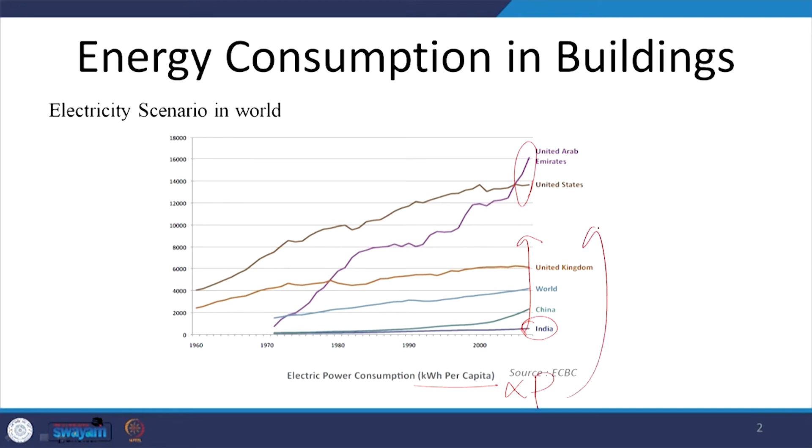If we look at the energy scenario of the world, we can see that the per capita consumption of energy, in kilowatt hour per capita, the developed nations have very high per capita numbers, and our country has very low per capita energy usage. But if we look at the overall numbers, the population and the absolute numbers, we are quite high simply because we have a huge population, and if we multiply this kilowatt hour per capita by our population, we would see that we are quite high up there when overall energy consumption is concerned.

If we look at this energy scenario of the world, since most of the development in nations, whether they are developed nations, developing nations or underdeveloped nations, is directly linked to the energy available in a country, every nation focuses their attention towards creation of new energy sources or towards conservation of energy when simultaneous development has to happen. So, a large percentage share of GDP is actually going towards the creation of energy resources.

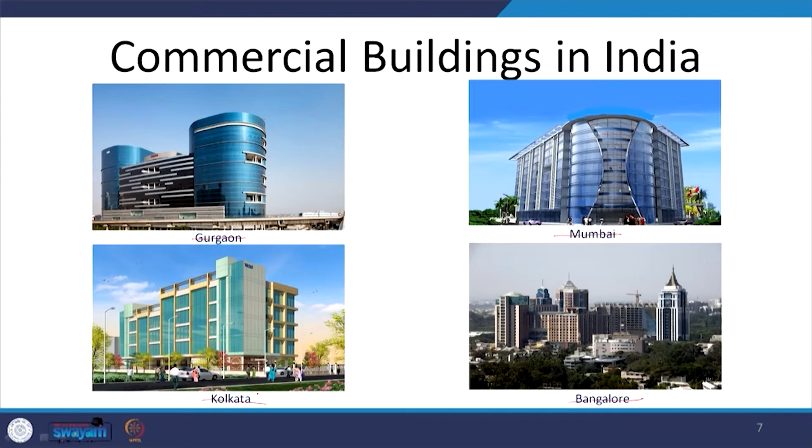And we look at some of these buildings in different parts of our country, they look very similar. So, if I remove these names here, they more or less look the same. This is the kind of commercial buildings which are coming up in India. So, they are extremely energy intensive.

They consume a lot of energy, not by virtue of their design. We are not even talking about the design. Some of these buildings may be highly efficient, they might be using the best of the materials, but just by virtue of the functions that are housed within them, these buildings are highly energy intensive. However, we can still reduce or contain the amount of energy which is being consumed in these commercial buildings.

Now, if we look at the concept of energy efficiency, it is a very simple concept. If around 100 units of primary fuel has been supplied, through the process of electricity generation and transmission and distribution, finally when the energy reaches our household or commercial buildings, only 24 units are supplied, which implies that if we save 1 unit here at the end user end, around 4.2 units will be saved at the power plant end. And here we are not even looking at what goes behind this.

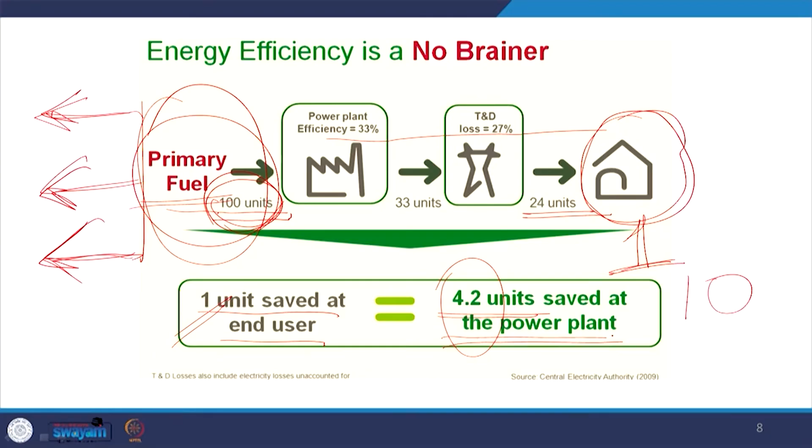So, while we are talking about adding a lot of energy sources, we should ideally simultaneously be talking about energy conservation and energy efficiency at the demand side, where for each unit saved, we are talking about at least 4.2 units saved at the power plant end. Hence, a very simple proposition, and also the investment which is required to manage the demand side is much lesser than to add more supply to the supply side.

It is a low hanging fruit, it can be done right away, right now, and it does not require long term planning. It is a short term planning which is required, and we can start doing it immediately. That is why we talk about buildings and conservation of energy at the building level itself.

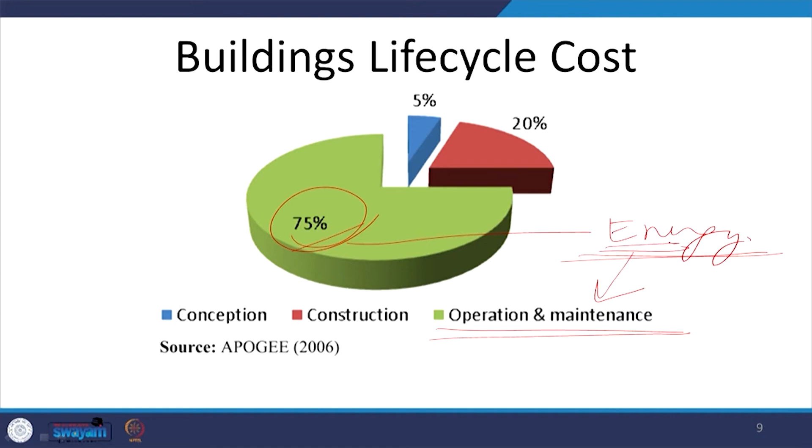If we look at these buildings and we look at the life cycle cost of a building, we can see that around 75% of the life cycle cost of the building is during the operation and maintenance phase. And of this operations and maintenance phase, a large part of the cost is actually the cost of energy. Besides energy, there are other resources which also inflow. For example, water is there, some material is also there, but a large part of the cost which goes towards this operation and maintenance is the energy cost. And hence, we talk about conserving energy, making our buildings more and more energy efficient.

So, I have been using energy efficiency and energy conservation quite interchangeably throughout my discussion so far. I use energy conservation sometimes, I use energy efficiency. Both are the means for demand side reduction of energy use. However, they are not exactly the same things. They are two very similar but distinct terms and processes.

So, when we talk about energy conservation, we are talking about any behavior or a process that results in the use of less energy. So, for example, turning the lights off when leaving the room, or making more and more of your spaces naturally ventilated and not air conditioning them at all is an energy conservation practice.

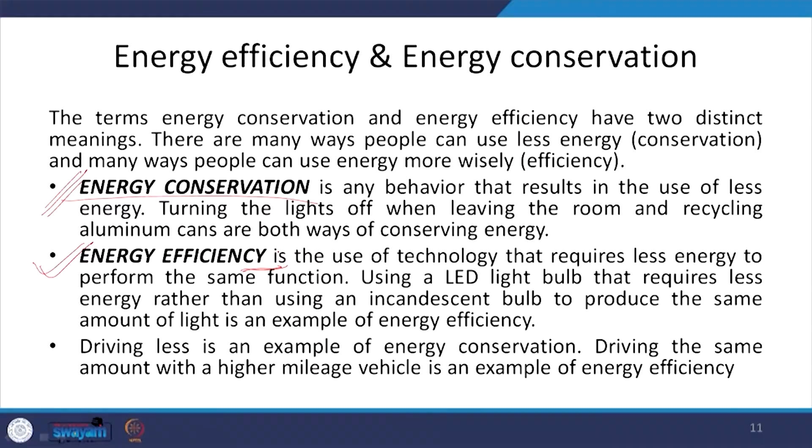While when we talk about energy efficiency, it is the use of technology that requires less energy to perform the same function. For example, in any room, if we have to provide for 100 lux or 300 lux of artificial lighting, after we have already reduced this demand by adding daylight. So, if I have to provide for 300 lux, while I have already taken into account the energy conservation measures, instead of providing a CFL or an incandescent lamp, I would actually be using the LED light bulb, which will be more energy efficient. So, for the same amount of illuminance, I will be using less electricity, and that is what energy efficiency is.

So, both energy conservation as well as energy efficiency are needed to reduce the demand for energy in buildings. So, if we are talking about energy conservation, we are talking about the design principles. We are talking about how do we design our HVAC, how do we design our lighting and electrical units. While when we are talking about energy efficiency, we are talking about building envelope. So, what kind of materials should be used and what should be their thermal properties? What kind of HVAC systems?

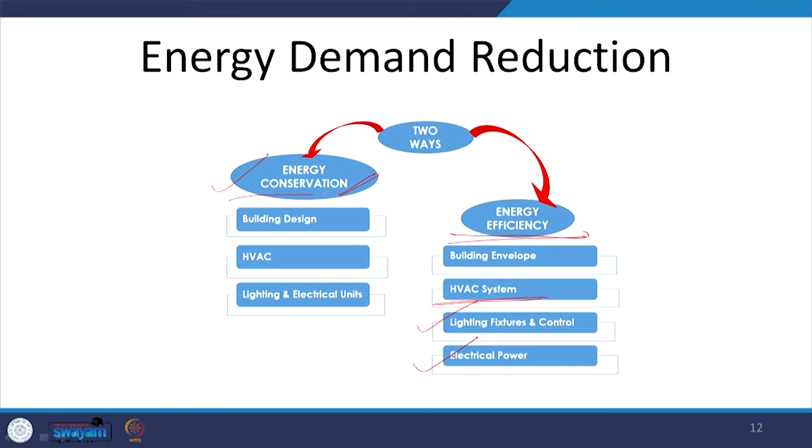So, again we are talking about HVAC system, but besides design, here we are talking about the efficiencies of these HVAC systems. So, maybe we have already reduced the tonnage of AC from 500 tons to 300 tons, that is through conservation, adding different types of practices and design strategies. But that 300 tonnage of HVAC can also be installed with very high coefficient of performance or very high energy efficiency. Same as with selection of lighting fixtures and their control mechanism, the sensor technology and also the electrical power. So, when we are talking about energy demand reduction, we are talking of these two ways simultaneously and not in isolation at all.

Now, when we talk about this demand side reduction, we are talking about the fundamentals of building physics. We should know how the energy is transferred and what are the different functions for which energy is consumed in a building. So, when we look at this energy consumption pattern in a building, there are various functions for which energy is consumed. Largely, energy in a building is consumed for maintaining thermal comfort, for maintaining environmental comfort inside the building, that is for HVAC, heating, ventilation and air conditioning.

So, our mechanical fans, the air conditioners, they consume the maximum amount of energy. Besides that, a huge amount of energy is also consumed by lighting fixtures. So, the artificial lighting fixtures which are installed in the buildings, they also consume a substantial amount of energy. So, these two are the major guzzlers of energy, besides of course the equipment and tools which are anyways going to be there, and also processes like cooking, or in commercial buildings there might be processes like computing, photocopier, stationery,

and several such activities. So, whenever we are talking about building energy efficiency and building energy conservation, we are largely focusing on these two heads, which is energy consumed for thermal comfort, environmental comfort creation, and for the artificial lighting purpose.

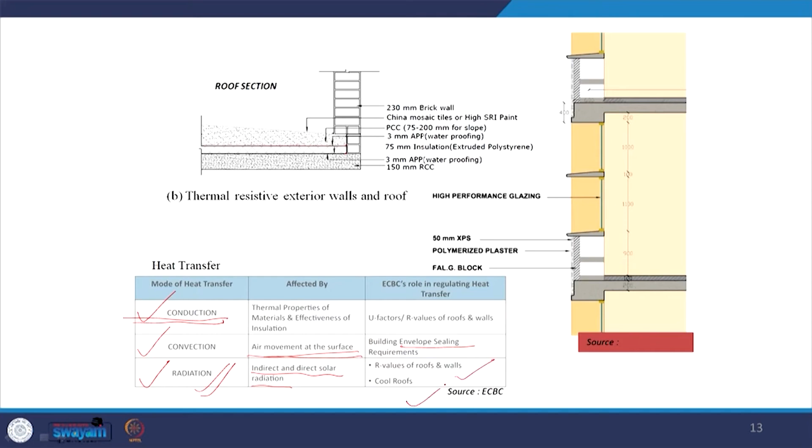Next, we are talking about convection. Now, heat transfer through convection takes place because of the air movement at the surface and also through the fenestration. So, when we are talking about this heat exchange through convection, we will be talking about the envelope sealing requirements so as to reduce this heat loss through convection. And lastly, when we are talking about radiation, we are talking about indirect or direct solar radiation, and here we will be again talking about the R values of roofs and walls, we will be talking about the SRI values, the albedo values of the materials.

So, a couple of these terminologies that I have used to explain the basic concepts of heat transfer, I will be covering as part of my first lecture, and then gradually we will move on to more of the compliance approaches and how to select the materials, how to understand the various codes related to the energy specification when we are talking about sustainable buildings. So, the first property is specific heat.

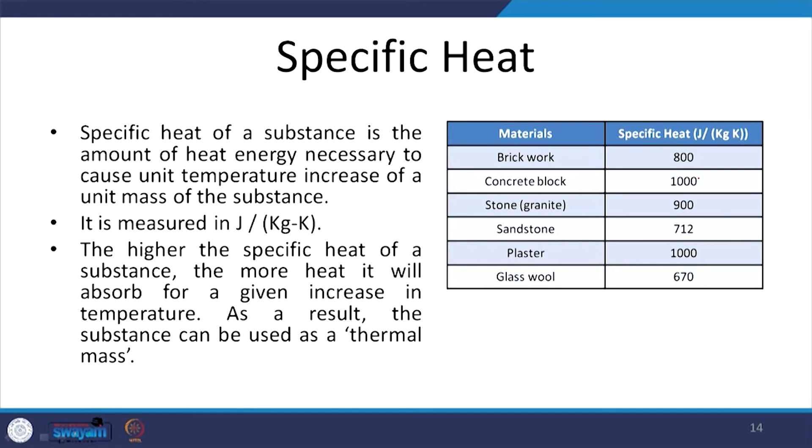All of you who are attending this course are science graduates and you very clearly know what specific heat is. So, specific heat of a substance is the amount of heat which is required to cause a unit temperature increase of a unit mass of the substance. Now, what it implies is that the higher the specific heat of the material, the more heat it can absorb from either side of the building and gradually transfer to the other side. So, if we have a material which has higher specific heat, it means that material can store heat for a longer duration and also more heat can be stored given the volume of the material.

The next is thermal conductivity. Now, thermal conductivity is a property which tells us how much of the heat will be passing through the thickness of the material from one side to the other side when the difference between the temperature of its one face to the other face is 1 unit degree.

So, it is expressed in a unit which is watts per meter per degree Kelvin, which is for a unit thickness. So, for example, 1 meter thickness of a material, how much heat can be passed from one side to the other if the difference between the two surfaces is 1 degree Kelvin.

Now, higher is the thermal conductivity, higher is the rate at which heat will be transferred from one side to the other side. So, if we look at this, stone has a very high conductivity. So, though it also has very high specific heat, it also has a high conductivity, which implies that it can take in more amount of heat, but it will also transfer at a much faster rate.

If we look at concrete, again high specific heat but high thermal conductivity. Brick also has high thermal conductivity. Metals have even much higher thermal conductivity. We know that is why most of the metals are good conductors of heat. So, whatever amount is taken from one surface, almost the entire is passed to the other surface, and that is why thermal conductivity is quite an important property.

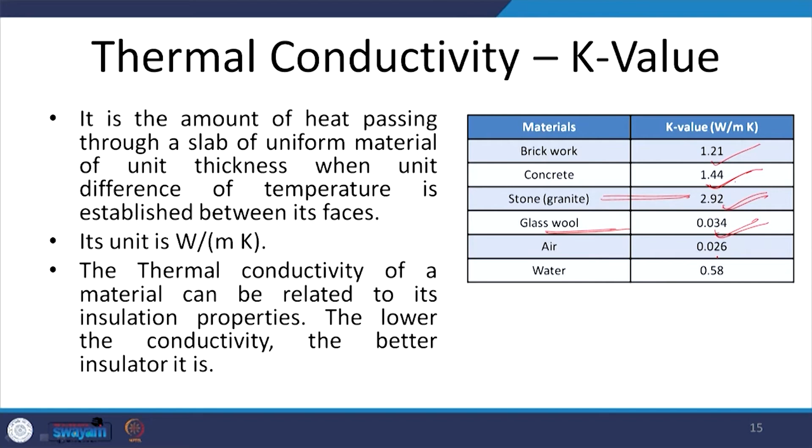On the other hand, a material such as glass wool has very low conductivity, which makes it a good insulation material. When we talk about conductivity for a unit area of a material irrespective of its thickness, then it becomes conductance. So, if we look at its unit, it is watt per meter square per degree Kelvin.

So, the amount of heat which is transferred from one unit area of a material of a given thickness to the other side for 1 degree temperature change is what conductance is. Conductance is directly dependent upon the thermal conductivity and the thickness of the material. Now, we have the reciprocal values of conductivity and conductance, which are called thermal resistivity and thermal resistance.

Thermal resistivity is the property of the material to resist the transfer of heat, and it is the reciprocal of the conductivity. So, higher is the resistivity, better is the insulation property or capacity of the material. Now, again, resistivity is for a unit thickness of the material for a unit degree change.

Thermal resistance is the reciprocal of conductance, and it is the property applicable to the unit area of the material of uniform density to resist the transfer of heat. We use R values when we are talking about the insulation properties of the materials. We talk about conductivity and conductance when we are talking about the heat transfer property of the material.

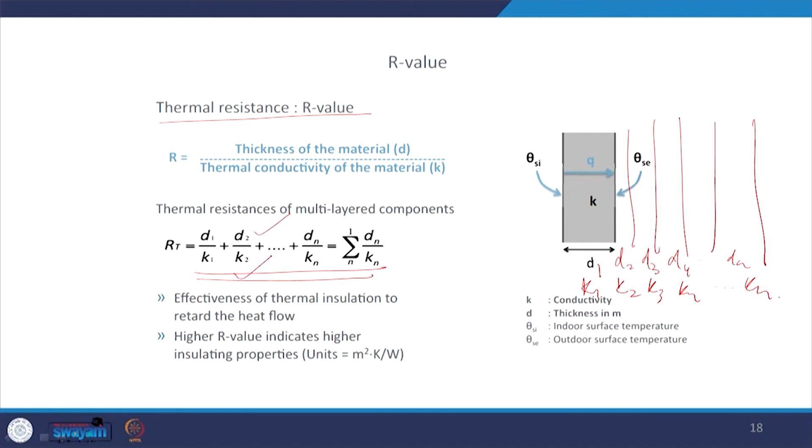So, if we have to calculate the R value, which is the thermal resistance, and if there are multiple layers of the material, so instead of one single material, if we have multiple layers where the thicknesses vary from D1 to Dn, and their conductivities also vary from K1 to Kn, using this formula, which is the summation of the thickness of the material divided by the conductivity of the material, we get the total thermal resistance of a material.

Now, we have another value which we use as thermal transmittance, which is the U value. This is the amount of heat which is passing through a unit area of a given material of unit thickness for unit degree change of temperature from one surface to the other surface. So, the unit is watt per meter square per Kelvin. It has a unit similar to conductance, but it takes into account a unit thickness of the material and the unit area.

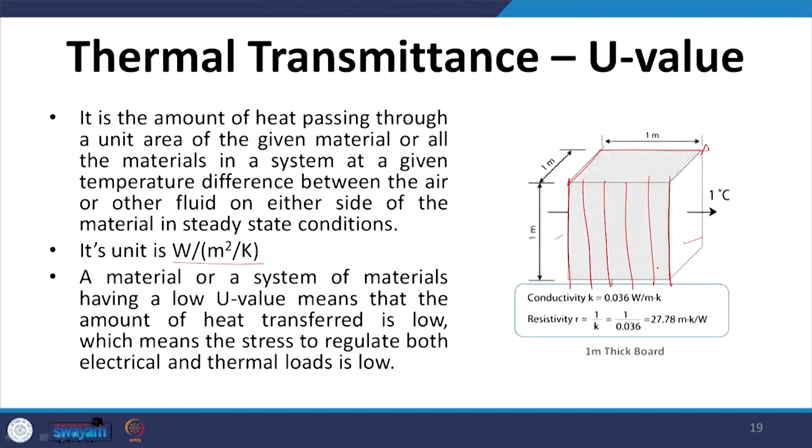This is a very commonly used property, which we will quite often come into contact with, and a lot of our codes talk about the U values of these materials. Now, again, U value could be for a uniform material which is of uniform density. It could also be for layers of materials, where we would be talking about a combination of these materials and the overall thermal transmittance, which is the overall U value for a given assembly.

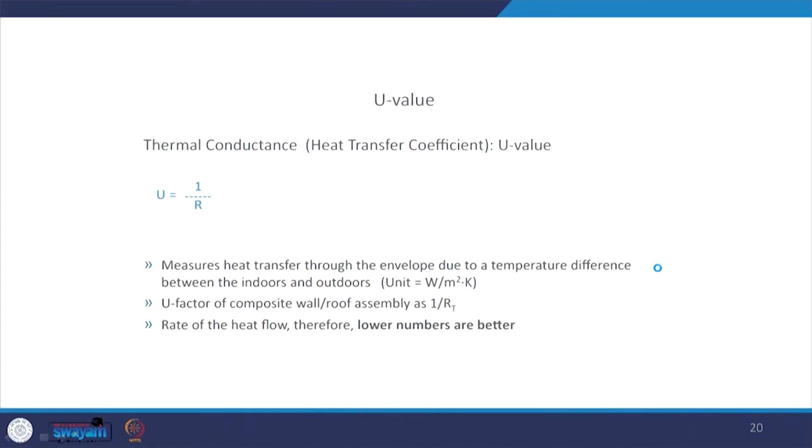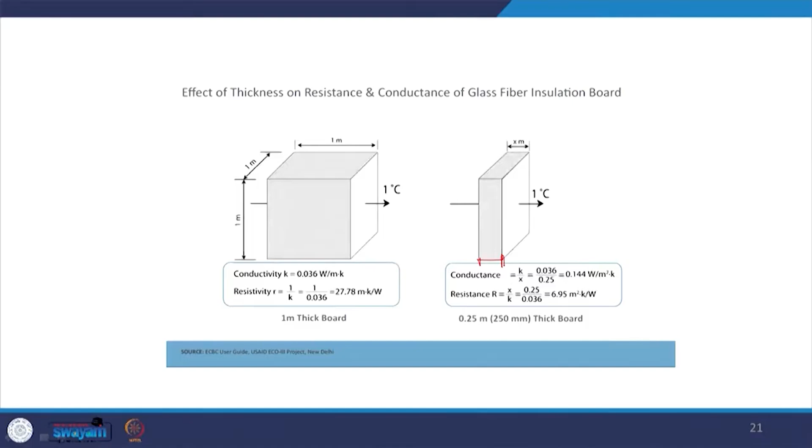So, assembly U value or the thermal transmittance is the reciprocal of the thermal resistance. If we look at the effect of thickness on the resistance and conductance or transmittance of a material, we can clearly see as we reduce the thickness of a material, its conductance increases. So, instead of a unit material, say 1 meter, for which the conductivity was 0.036 watt per meter Kelvin, which is also the conductance in this case because D is 1, the thickness of this material is 1 meter, here the thickness has been reduced.

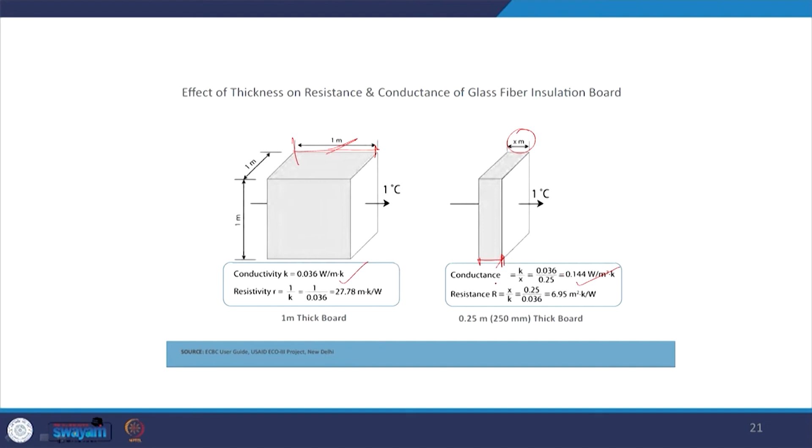So, the conductance of this material has increased, which implies that more heat will be passed if the thickness of the material is reduced, keeping all other properties the same. So, the specific heat remains the same, the conductivity remains the same, but the conductance changes if the thickness is reduced. A couple of other properties include albedo.

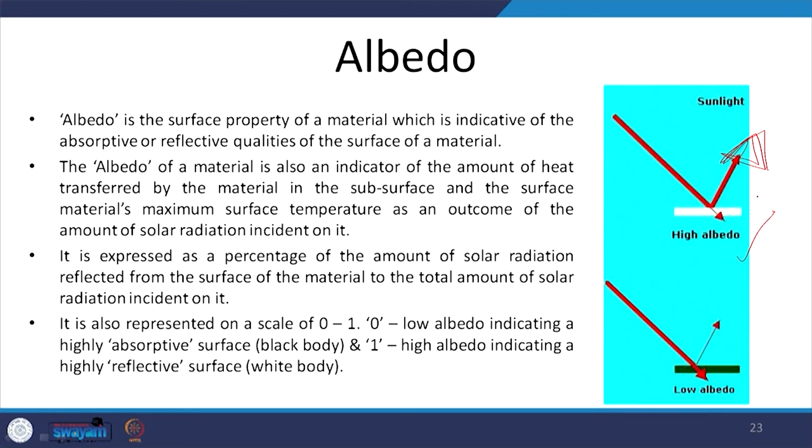Now, albedo is the surface property of a material which is indicative of the absorptive or reflective qualities of the surface of the material. So, it is the quality which implies how much of the heat incident on a material is reflected or absorbed by the material. So, the higher the amount of heat reflected, the higher the albedo of the material. High albedo materials reflect most of the energy which falls on them, while low albedo materials absorb most of the energy incident on them.

Next, we also talk about high SRI external finishes. I will not go in detail over this particular property here, because we have already discussed it in detail when we were discussing the urban heat island and selection of materials for reducing the urban heat island at the site level. Now, all these properties will be used while selecting the materials for construction of the building envelope or for adding insulation layers on top of these structural members, structural materials.

Here, when we are choosing the insulation, there are multiple properties which need to be kept in mind. We have already discussed one: the thickness, how thick the insulation has to be, because we have seen the lesser the thickness, the more the conductance and the less the resistance. Then its density. Different materials behave differently. Often higher density materials transmit more heat from one side to the other as compared to low density, porous materials, because those have more cavities, often filled with air.

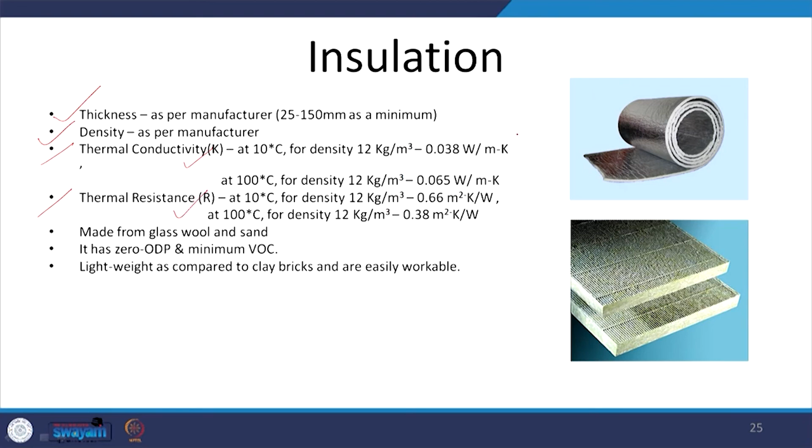Then we also talk about the thermal properties, thermal conductivity and thermal resistance or resistivity. The higher the thermal resistance, the better the insulation material. Another property is called solar heat gain coefficient, and it is specific to transparent building materials which can permit transfer of heat and light, but mainly heat, from one side to the other side.

Now, whenever solar radiation is incident on a material surface from one side, part of it is reflected back, part of it is absorbed by the material, which is later re-emitted, re-radiated to both sides of the material depending upon the thickness and the property of the material, and some is directly transmitted inside. So, SHGC is the sum total of all that is transferred from outside to inside or vice versa, from the heat gaining side to the heat receiving side.

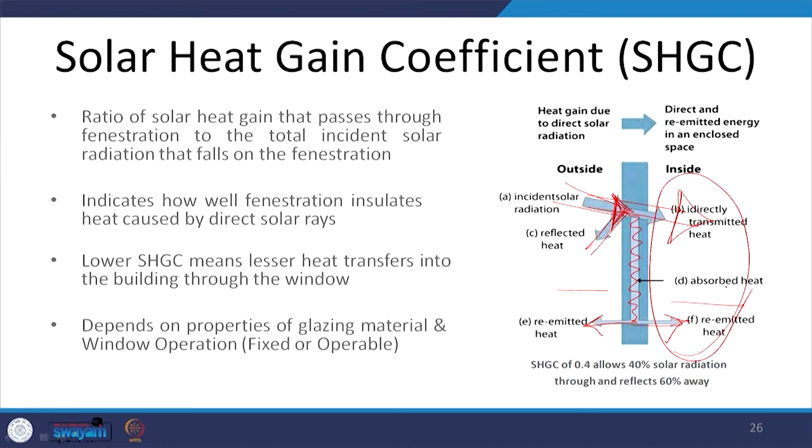So, the total amount of energy passed from the incident side to the other side, as a percentage of the incident solar radiation, is what solar heat gain coefficient is. A higher solar heat gain coefficient implies a higher amount of heat transferred from the heat gain side, where the incident solar radiation is received, to the indoors.

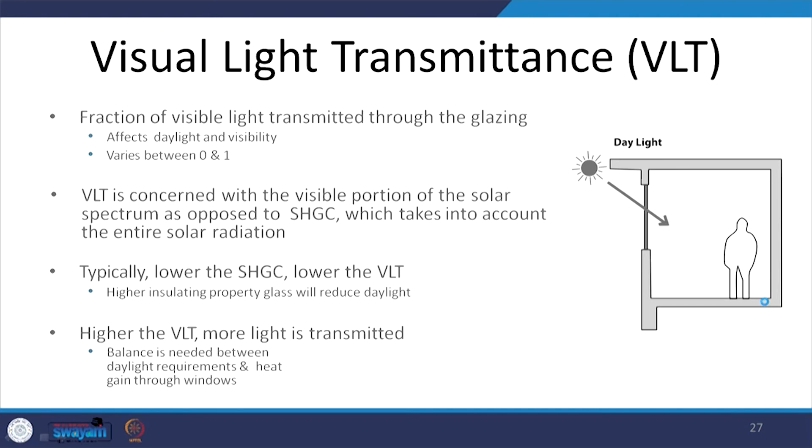Next property is visual light transmittance. This implies what fraction of visible light is transmitted. In SHGC we are talking about the heat component of the solar radiation. Through visual light transmittance we are talking about the visible light fraction of the incident solar radiation which is transmitted through the transparent or translucent building material, often glazing here.

So, this varies between 0 and 1. 1 implies 100% of the visible light is transmitted through the material to the other side. A higher VLT implies more daylight penetrating indoors, thereby reducing our dependence upon artificial light.

So, with this I will stop my lecture here, and we will discuss how all these properties are used in buildings, in the design of energy efficient buildings, which is an important property of sustainable buildings. See you in the next lecture, where we will be discussing more on energy conservation and efficiency measures and practices for sustainable architecture, sustainable buildings.